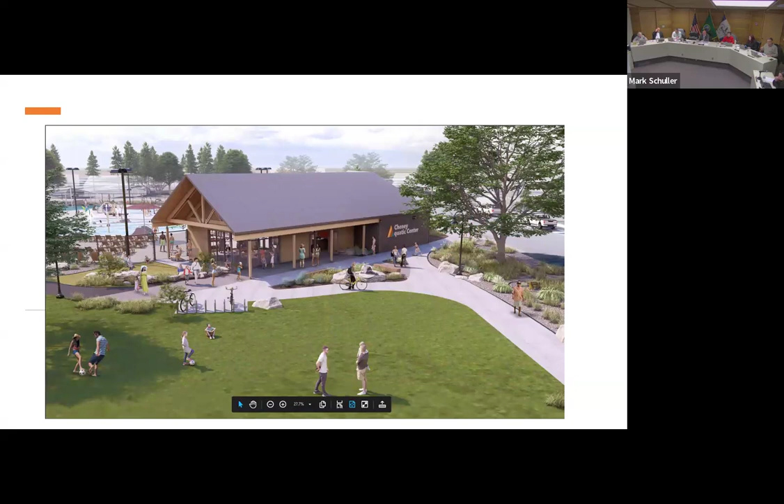Yeah, so really the discussion early on in the design, let me go back here. Early on in the design, we had parking off at North 8th Street. By the time we tried to fit 20 spaces in there, we were taking a huge chunk of that northern park, really cutting into what we considered that recreational activity. So in lieu of building the parking lot there and going with North 7th Street, what you'll see is that we can still circulate, people can still be dropped off. And we felt that if people park on this side, we do have a trail system that comes around that north side, so it's not too far to walk. That was kind of the concept of how to maximize the parking without impacting more parkland.

Up in this area on that north side, where North 8th is - my cursor is very slow - right in here, that would have been all parking and we'd have had to take out all the trees. We didn't feel we wanted to use this as a designated parking place, but also wanted to take a look at bringing other uses and recognition to the north side, and to the east side, because we already have a tennis court there. We heard that pickleball is starting to become very popular. Can we make something here that is more functional than just operating an aquatics facility 8 to 10 weeks out of the year? So the discussion about North 7th is not only a parking lot, but could we have 3-on-3 basketball courts, food trucks, concerts?

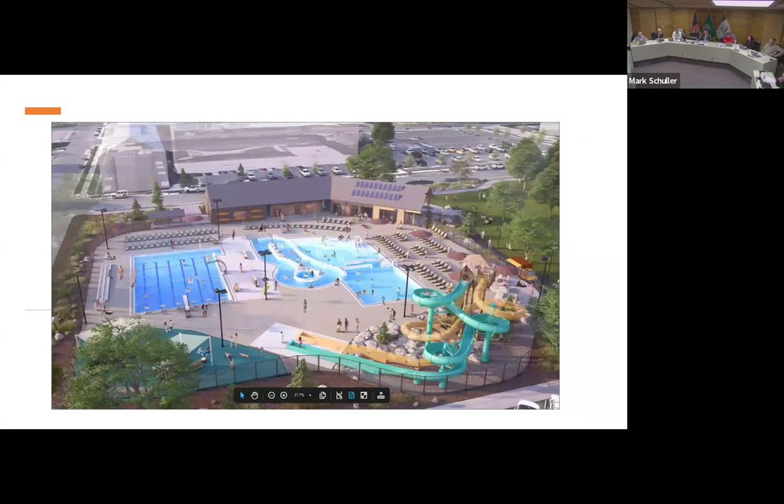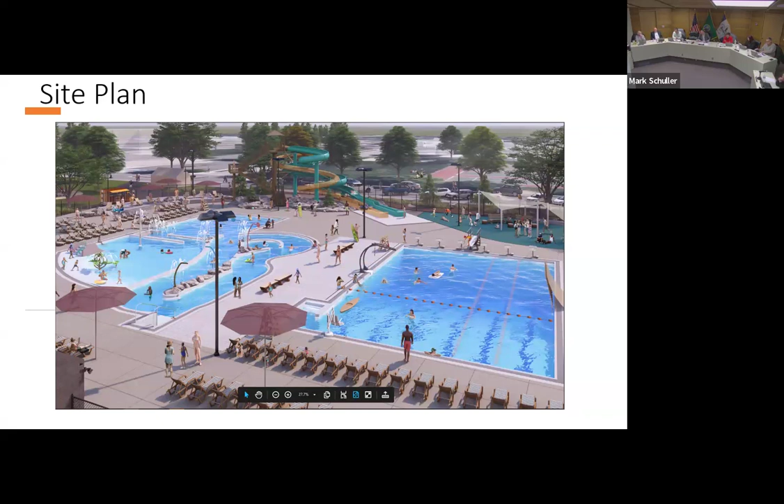Good questions. So really, renderings here, kind of seeing from different angles. This right here is the entranceway. So if I'm standing next to North Eighth, this is where you actually go into the facility, but we wanted to kind of create an area where people can still gather outside the pool area.

We're right now talking about placement. We have a lot of boulders in Cheney, don't get me wrong. We have a stockpile of boulders. So this natural xeriscape is perfect with this cozy cabin feel, because we're actually talking about taking a lot of these boulders and making them seating areas around the area and combining with lawn and having that feel along with that xeriscape plan.

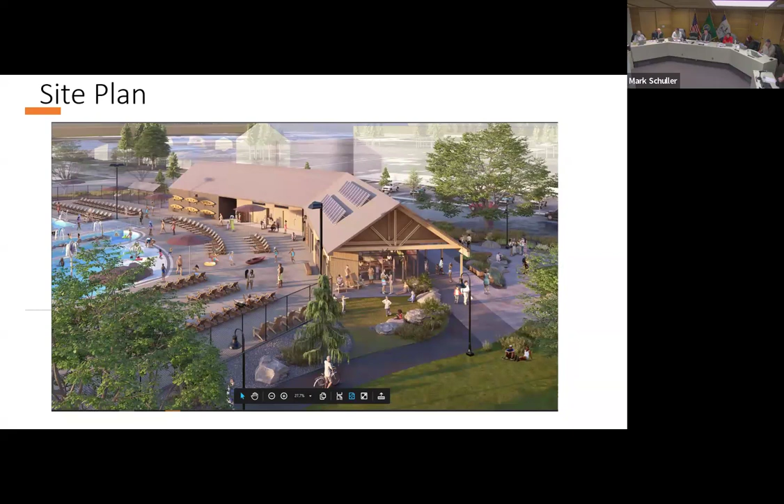So this is looking from North Eighth, the north side of it, looking into the community center on the left. And then there's a doorway that goes out. That's where you would go, pay your admission and head into the pool, head over to the locker rooms and go from there. It's looking towards North Eighth and Cedar, a different view. Kind of cool rendition. Take a look at North Eighth and look out towards North Seventh.

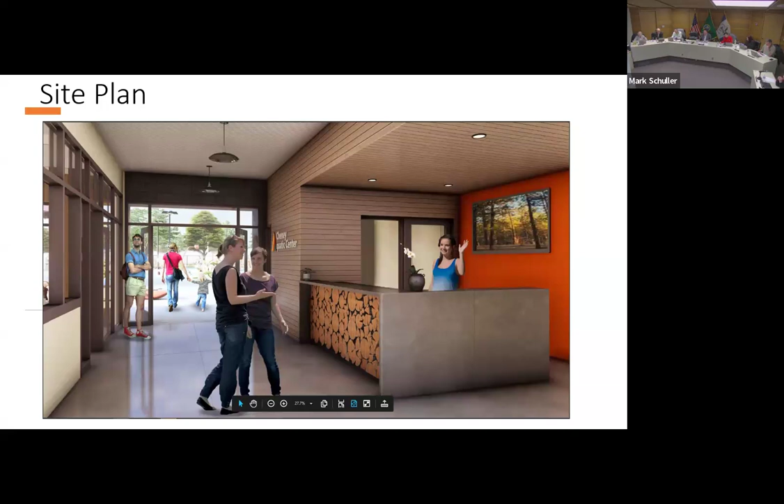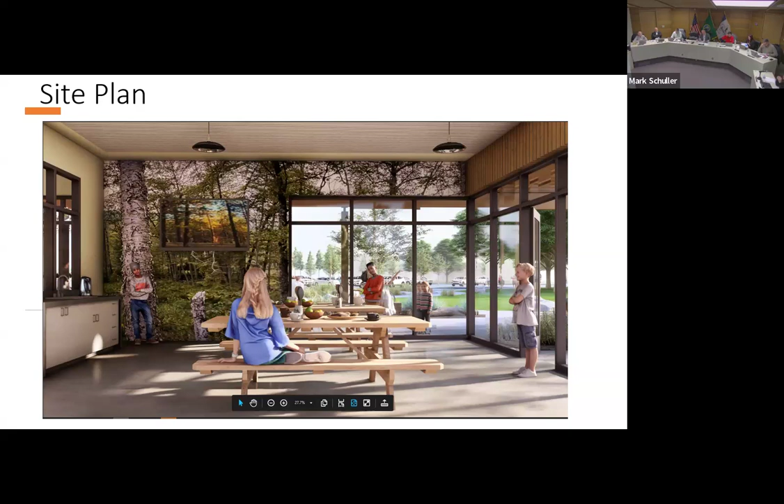So really the decision point why we're here tonight is that we did a lot of research on stainless steel or concrete pool. We visited quite a few facilities. We talked to a lot of the maintenance people. Myrtha Pools is a stainless steel manufacturer. This product is built pretty much in a controlled facility. They build it in sections. They ship it out on site.

We bolt it together. The stainless steel has a PVC lining welded on. There really is no painting of the pool anymore. It's a solid PVC, with the seams PVC welded in place. And what we liked is that Myrtha is a pretty big operation. There's thousands of these pools all around the United States, all around the world. And they do have warranties, 25-year, 10-year warranties, something that we won't get from a concrete pool. We would maybe get a standard 2-year warranty.

Everything we were visiting seems to indicate a Myrtha pool. So I have some takeaways, why we're leaning towards a Myrtha. Higher up front material costs; we have the comparisons on the two tanks compared to concrete. But also the labor costs. Painting a concrete pool every year or every 2 years is pretty labor intensive. With a Myrtha pool, we can sweep it, we can power wash it, no product in there except for just a little bit of labor.

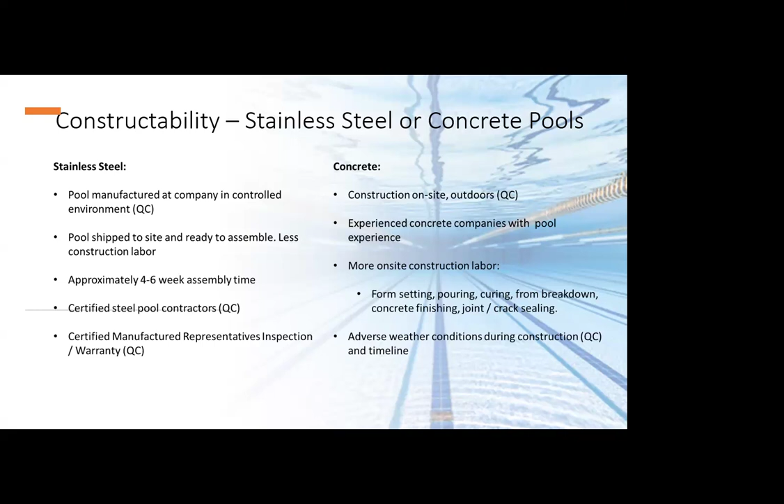So I just kind of took a stab, just in talking with constructability on stainless and concrete pools, talking to some NAC and some of the contractors. This is some of our concerns, stainless pool. Now, when I put QC there, that means quality control. So the manufactured pool is at the company. It's built at the company in environmental control. To me, that's quality control.

Pool is shipped to site, ready to assemble. So this can be sitting there and when they're ready to assemble, they can put it in place. I have some videos I'll show you. They actually build Olympic swimming pools within a couple days. They have enough staff to put them in stadiums and build this Myrtha pool for these events, and then they break them down afterwards and they go. So what really sparked our interest is that the assembly is probably about 4 to 6. It's a bolt together, and basically it's ready to be assembled.

Certified steel pool contractors, we do have them in the area. There's a handful of them. That's a quality control concern for me. And then also, nothing beats that certified manufacturer representative inspection for our warranty, which is basically 10-year on the floor and 25-year on the wall. And keep in mind, these are pretty much pools that are operated all year round. We're only operating pretty much 10 weeks out of the year. So I think we have a little bit longer lifetime.

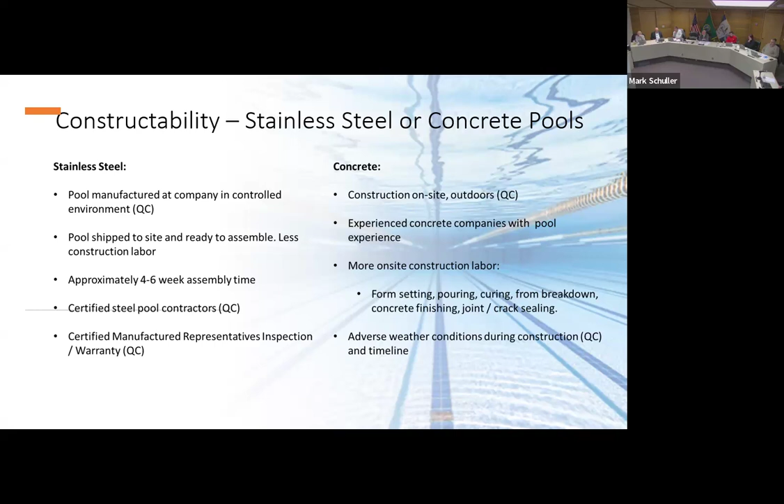Adverse weather conditions during construction. Quality control depends on when they start that pool, when they start that pour, and the timeline. So if we get into a winter and we have to wait till March or April to build the pool, with the cure time, those are some of the concerns that we have. So that's that.

So, material cost comparison. The material on concrete, we're getting estimated for a competition pool, is a little bit more expensive than what a stainless steel pool would be, and that's basically a savings of about 150,000. The leisure pool is a little bit more expensive. The stainless steel pool is about 332. So overall combined, we would spend about 186,000 over 10, 20, 25 years. With labor and paint and all of that, we could basically recover that.

All right, Myrtha pools. I'm gonna do a YouTube video. I hope this transfers through, but let us know if it doesn't. There's really short videos on the pool installation process, so you understand how it works. If not, we'll go back to the PowerPoint presentation.

I don't think it's working, is it? Can I just sync? Oh, I don't know. No, thanks. I'm not an IT person here. That's not showing. Stop share. Okay.

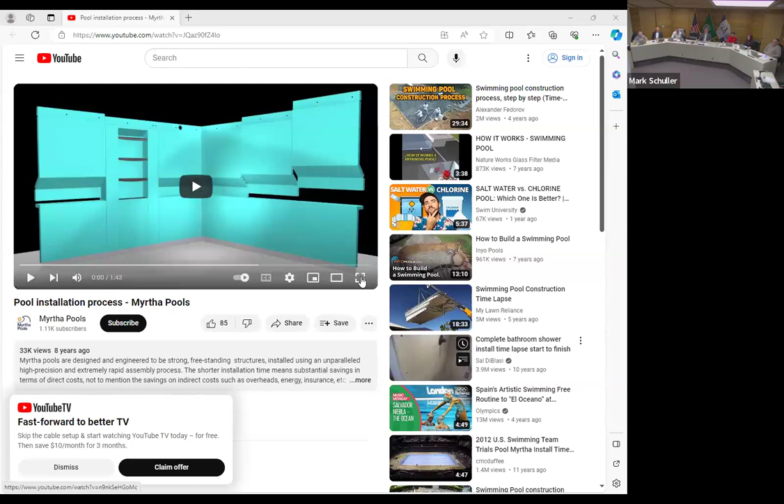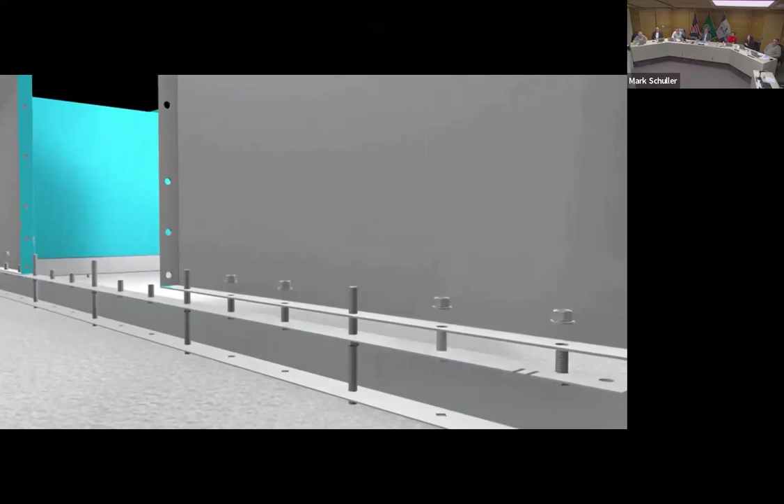So here's the video. Let me see if I can full size it here. So it goes down on a pad. We can adjust the bottom just by adjusting those bottom parts, and the walls go in. The structure goes along behind. Backfill up against the back side of it.

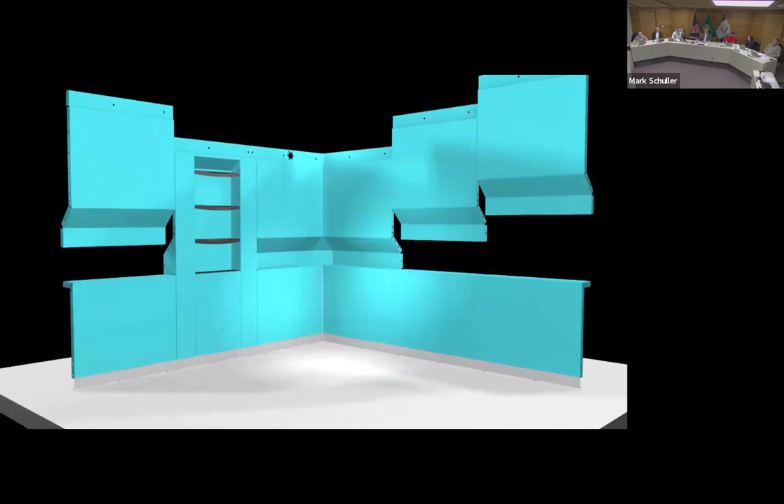If you have some socket wrenches, you could probably volunteer. I was gonna say, even I could do this. Yeah. Only a minute or so video, but it seems really long.

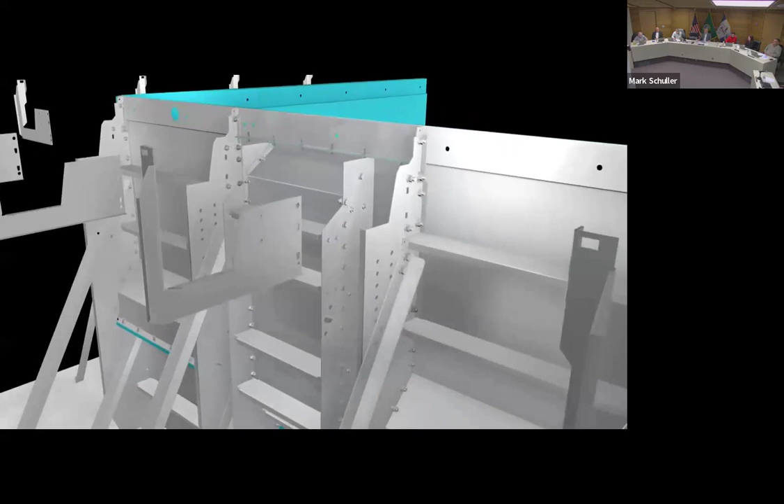That's how they kind of push it in place and form. One thing about the Myrtha pools, these are very lightweight pools, so you see a lot of these pools in hotels on rooftops and everything else just because of the design structure.

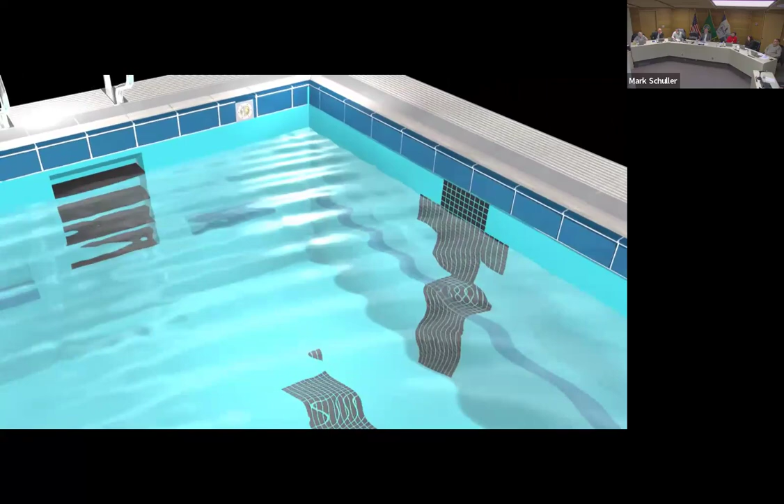So, water, yeah. That's not cheating.

Yeah. I'm gonna stop share this, and then I'm gonna try to open up this other one and see what I can do here. Apologize on this. I'm trying to sync it up so people can see it.

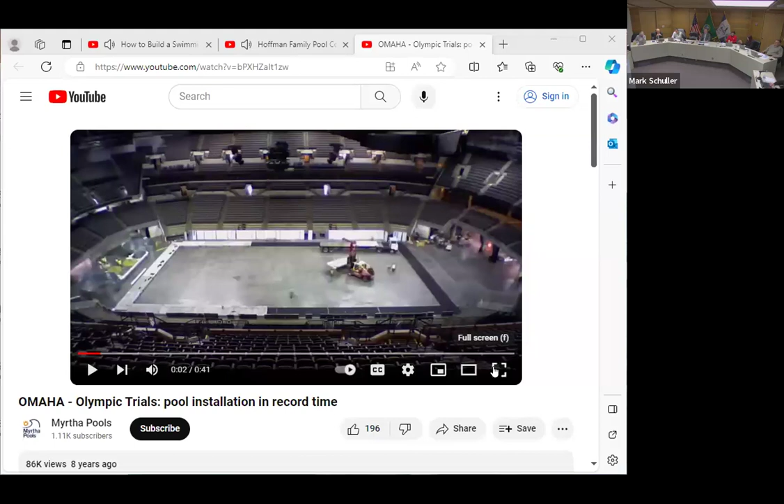There we go. This is a 30-second video, but this is actually in a Coliseum where they put in an Olympic size lap pool. So let me just go ahead and play it. I don't know if we'll get workers working this fast, but it kind of gives you the idea of how they set up the walls, how they lay out the pad, and how they build the stage to the back of it.

Hey Todd, I have a question. Really quick on the stainless steel pool. I think it sounds like a great choice. I'm just curious, it has a 25-year warranty. What happens? Do you have to get a whole new pool at that point? I know you said you'd recoup some of the costs for 25 years, but what does it look like?

I think the warranty, they probably wouldn't replace the pool if it was in such a bad shape, but the PVC can actually be molded or what they call welded. It's kind of like the same technology as in gas pipe. When they put gas pipe joints together, they're able to weld that together. And if we have a really good maintenance program and keep it clean, I would see that it would last beyond the 25 years. They just don't warranty it beyond that.

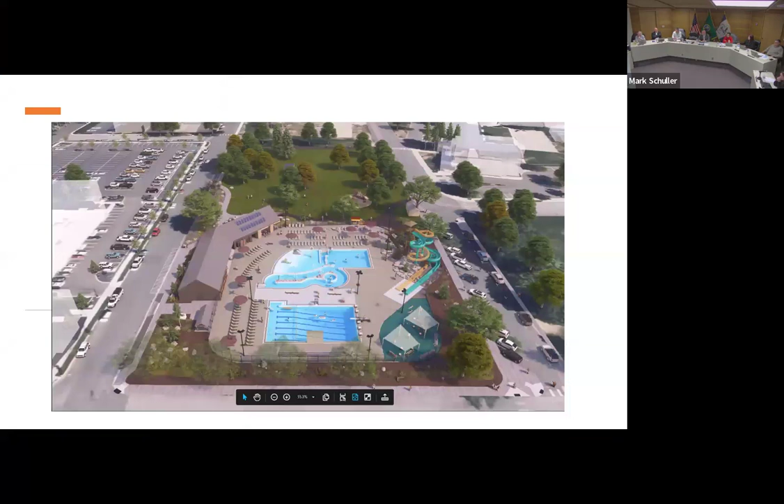So then once we're past warranty and things need to be replaced, it would most likely be the liner, which would be significantly less. The steel is a lot of what we're paying for. Yeah. Okay. And what's the average lifespan of the Myrtha? Well, I don't know what the average is, but they started over in Europe, and some have been in place for 50 years. The ones we looked at around here, some of them were at least 15 years old, and still going strong.

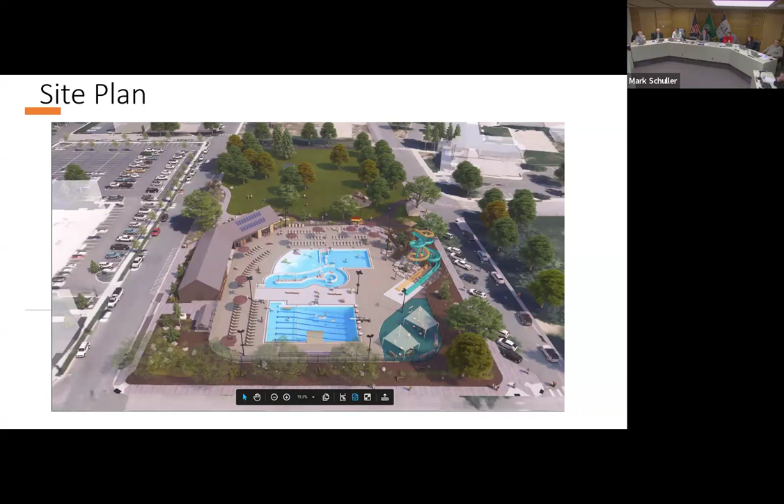Yeah, there was really never a problem with the walls themselves, with the stainless steel. It's more the floor that gets a lot of walking on. So one thing about the floor, in the recreational side, not in the lap pool because it's a deeper pool, they actually put padding underneath. So when you're walking in the Lazy River or the zero entry, it almost feels like carpet and not like concrete.

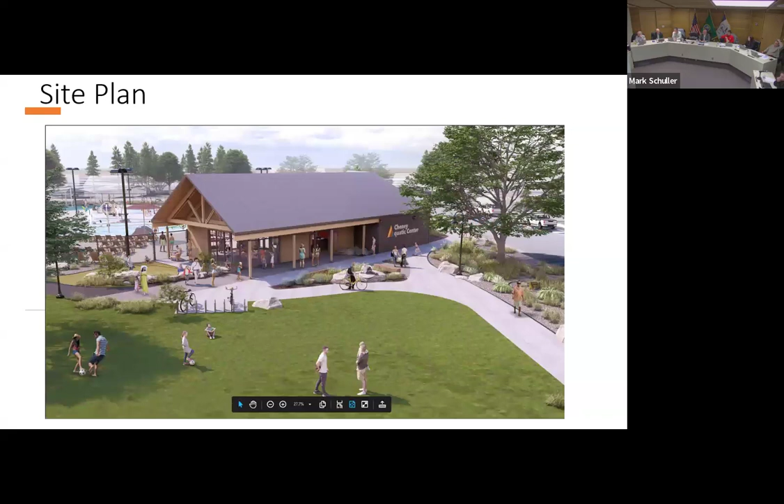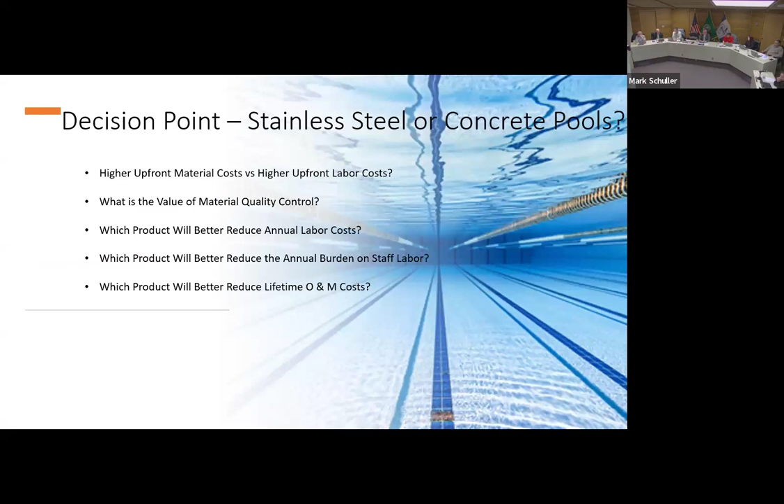And there's a way to repair it on a temporary basis. If heaven forbid somebody throws a chair in the pool and scuffs the liner, a certified repair person can come in, drop a contraption in, we can take the water down, and they can repair it right on the spot and get us back open very quick. So that's another benefit.

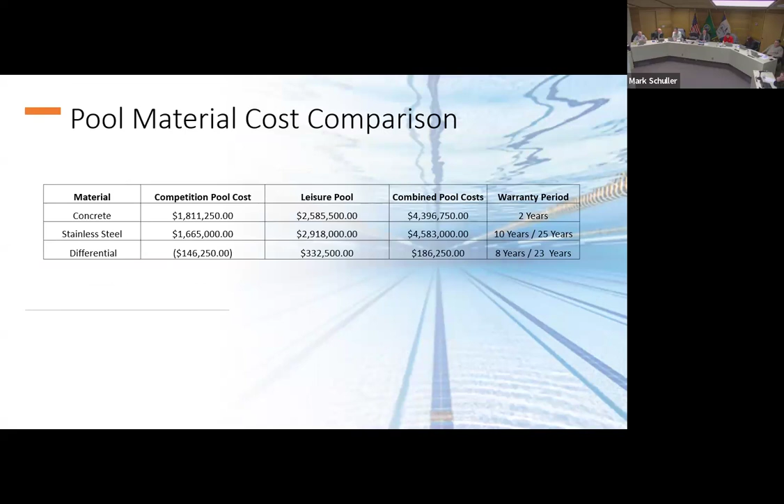And how long did our concrete pool last? 57 years or something. And here again, I compare that 57 because it was only open 8 to 10 weeks out of the year, and same with this pool. So it's not going to get that bathing load 365 days a year like an indoor facility.

So Myrtha Pool, headquarters in Italy. You'd be happy to send me to Italy. I can become Myrtha Pool certified, that might be part of the deal.

Pre-engineered modular pool system, you've seen in the video, laminated stainless steel panels with the PVC waterproofing bonding with the PVC material. Basically it's hot laminated. I apologize, I did have a sample for you. I'll try to get you one, but it is pretty sturdy. If you have a white PVC irrigation line, you know what that looks like. If you take that steel plate and mold that white hard PVC onto that steel, that's what you kind of get with the Myrtha.

Obviously, you've seen it, pool walls are bolted together. Joints are sealed. With the pool structure, we would recommend that goes on to a concrete slab for that, making those adjustments. And then the side supports would be supported with backfill of more or less a pea gravel buffer. And what's nice about this is that when talking to Myrtha, and we do have a meeting with them again here this next week, their time is about 150 days from the order to delivery.

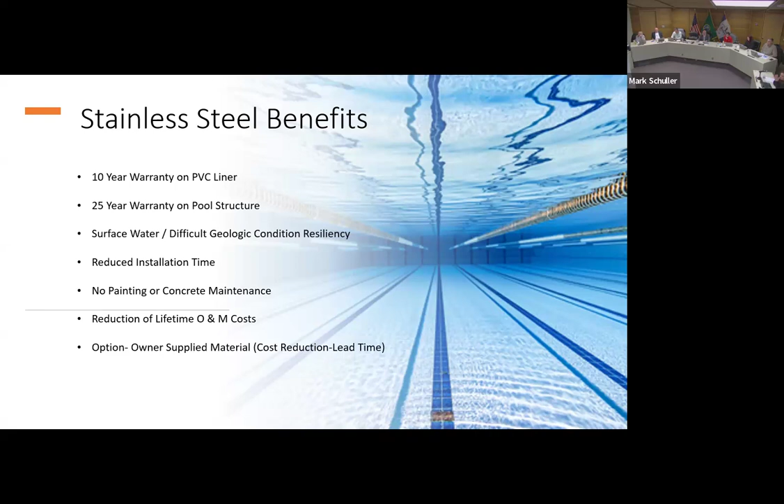So, really, these are the facilities that we visited: the Kroc Center in Coeur d'Alene, North Spokane YMCA, City of Pasco, that one has an outdoor facility. Idaho Central Aquatic Center has an indoor. City of Walla Walla has an outdoor, and City of Othello has an outdoor. Really the takeaway, quality construction oversight, very important if you've had a bad experience, because when they went out to bid, contractors really weren't certified and they didn't know how to put this thing together, and they struggled. Myrtha backed them up anyway, which was good.

Maintenance program, I can tell you that if we have a very passionate person about maintenance, it's going to be run very, very well. Mike at the Kroc Center, Coeur d'Alene, was one of those guys that you just have on speed dial, because he's very passionate about it. And so I think that really the takeaway is having a sound maintenance program to that end.

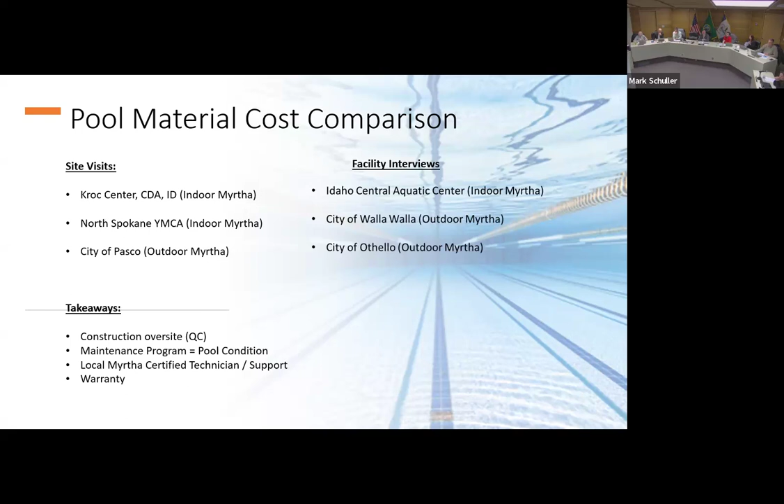Local Myrtha certified technicians. So when something happens and we need it, we have a certified technician roaming around the area that can actually do the repairs, or whatever. We call Mike. They sent him to Italy, so he can probably come out and repair the pools. And the big thing was the warranty. The warranty was probably one of the biggest things that we would really like to take. That was a big thing.

So you're going to have to refer probably to your back sheet here. I can't get to that end. So as of February 12th, how's the new construction cost? The new construction cost, we're looking at about 9.3 million. And then all the amenities that we identified as a high priority in the study was right around 543,000.

Whether we can afford that or not, my recommendation is to put the base structure in the concrete. If we ever wanted to have it in the future and couldn't afford it now, put some of these anchors in right now, and then we can purchase those in the future. But we looked at a metal roof alternative. So we do have these alternatives. UV treatment system, that one's pretty good in an indoor facility, but even with UV in an outdoor, it's really not, but it would be nice.

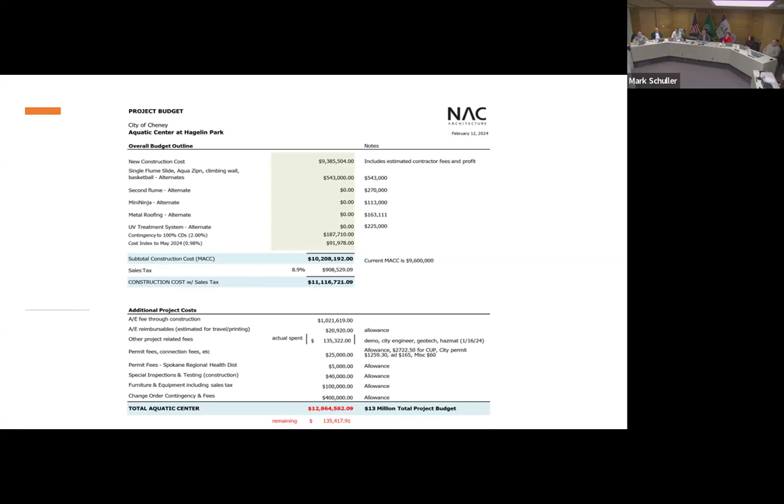Okay, if there's no more questions for Todd, let's move on to some action items here. Mark, resolution F221, that's the AFSCME labor agreement. We're going for third time's the charm here.

You had asked us to go back to the table to discuss the adoption of Juneteenth as a city holiday. If we were to do that, we would reduce the automatic floating holidays by one, but give them the opportunity to earn that holiday back by participating in wellness events, which are important to the city as we attempt every year to achieve our Well City Award, giving us a 2% discount on our medical premiums—important to the city and employees, as it's money out of each of our pockets if we were not to achieve that award.

So incentivizing them to take part and make sure that we reach those goals. In talking to the AFSCME negotiating team, they were amenable to making those changes that you had requested. I think at the end of the day, everybody comes out of this feeling pretty good about where we are, so I thank you for the input. It's taken a little longer than it normally does, but I think we got to a good contract on both sides, and would certainly hope that you would pass this tonight. I'll be happy to answer any questions anyone may have.